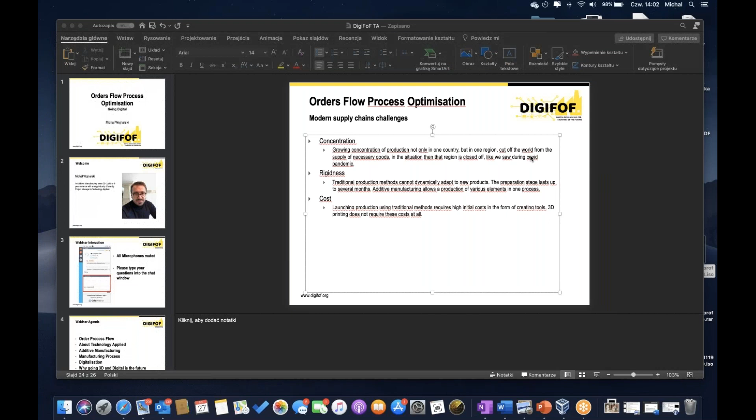Let me switch the presenter rights. Okay, I'll introduce myself again in a moment, just let me start sharing my screen. Is that all visible? Yes, that is visible. But first I need this to work, let me go back, I was doing some review.

Hello everyone, it's great to be here, it's an honor to present. A few words about me: I'm in additive manufacturing since 2012, with a small break for the energy industry, and right now I'm a project manager at Technology Applied.

I'm actually dealing with processes, so it's a great opportunity to present this issue to you. I'll try to condense a very broad topic, because we're dealing not only with the order flow process but also supply chains, and how these two things play together. That's the agenda, more or less.

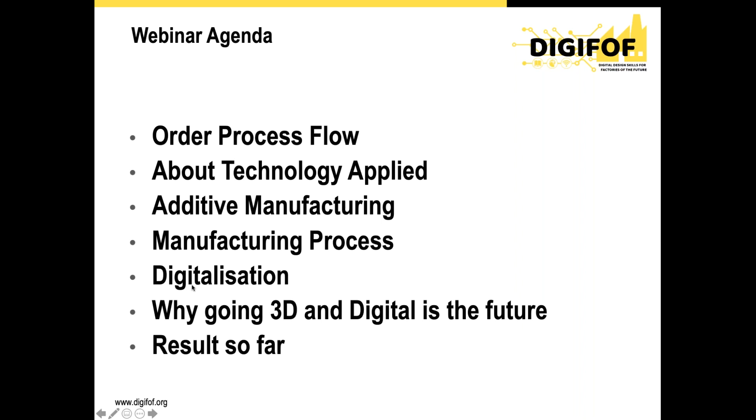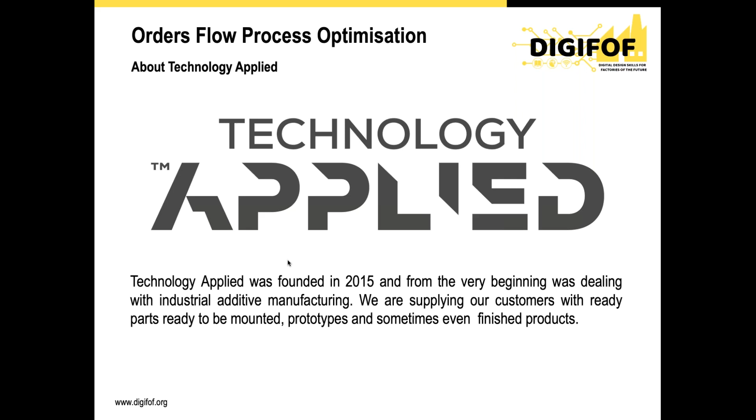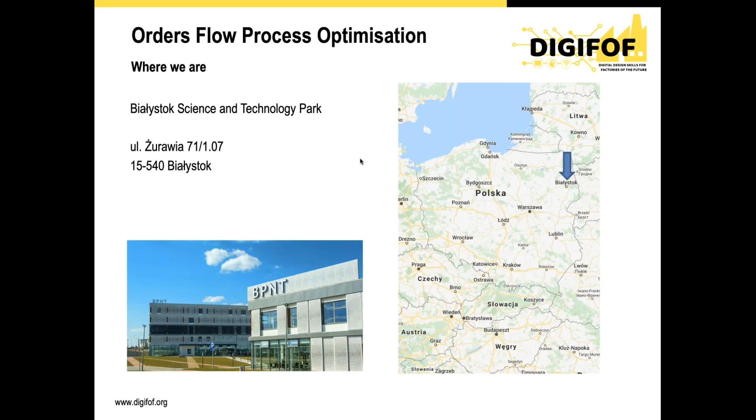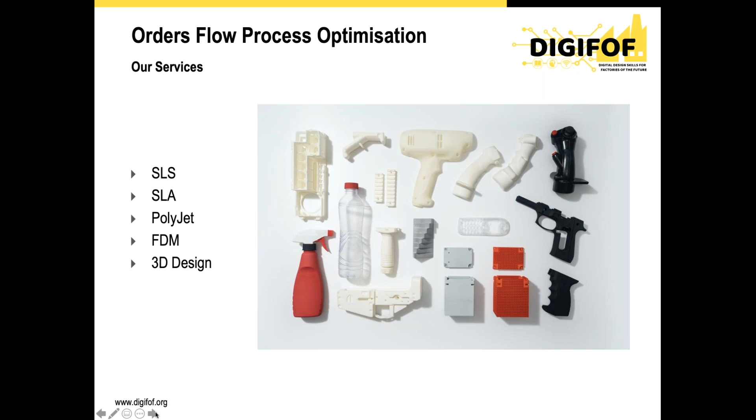A few words about Technology Applied: we were founded in 2015 with 3D printing in mind. We're one of the leading Polish service bureaus in this regard, specializing in SLS technology. We're based in Białystok, Poland, in the Białystok Science and Technology Park, so you're welcome to visit us anytime. We offer all major technologies apart from SLM yet.

That covers Technology Applied, so let's get to it. Let's talk about additive manufacturing. Probably most of you are familiar with it, but just for the sake of it, I'd like to give a brief introduction.

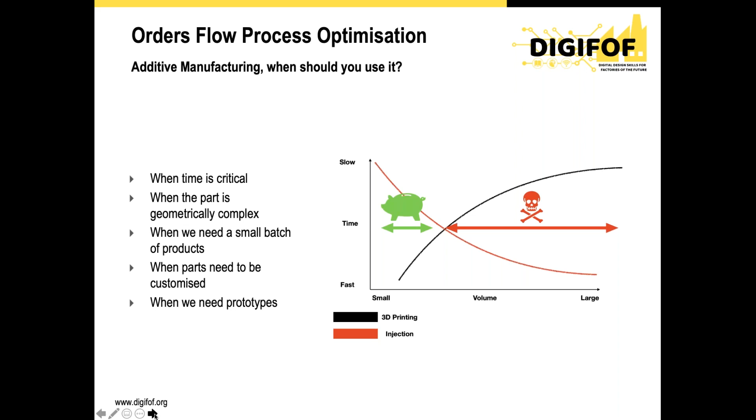Where additive manufacturing places itself in the supply chain: anytime time is critical, anytime parts are very geometrically complex, when we need a small batch very quickly—that's usually the case—and when parts need to be customized, or when we need prototypes. These are the instances where additive manufacturing is your best bet. We still believe there's much more area for additive manufacturing to expand.

But let's get to the process—this is probably the most annoying thing to companies that work in this industry. What's great about additive manufacturing is that it doesn't matter whether each part is different or they're all the same. But that's also the most challenging part.

If you can imagine, when you have a process—let's compare it to traditional methods like injection or CNC machining—you usually design the process for one part and then continue, so you can iterate and finally get the perfect process. In our case, the whole production line usually deals with different parts, so that brings many challenges to managing this whole process.

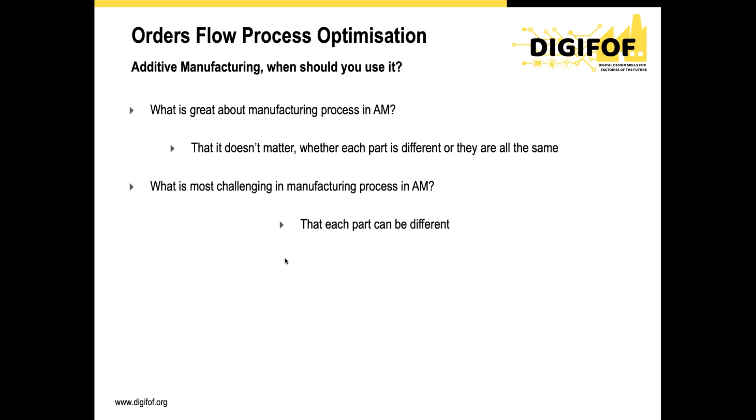We will discuss these problems on the digital side. The manufacturing process in our case—and probably it's the same in most companies—we get the file, or we don't, then there's the design part. It needs to be suitable for 3D printing, and of course suitable depends on what technology we're dealing with, so the file needs to be repaired or modified.

Over here we have many more options, but I would say the industry is not yet that open to these more advanced options, let's say.

So final quotation can only be provided using a pricing algorithm. If customer accepts the quote, the file is queued for production. Then the operator prepares the build platform considering all the requirements, puts together all the files and all the prints. Then we have the print process, and if post-processing is required, the print goes to post-processing, packaging, and delivery.

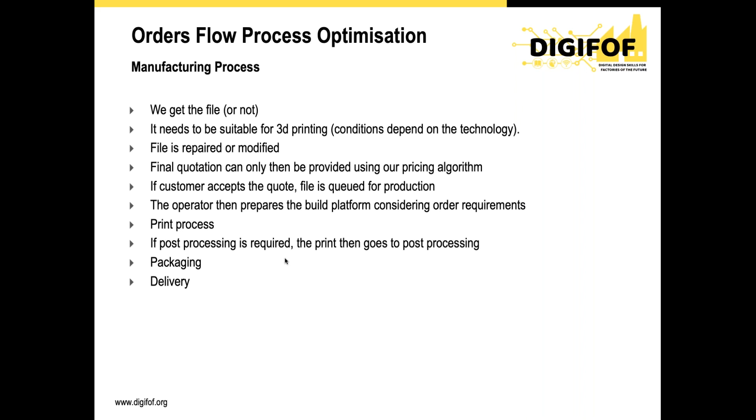So you see, we will be discussing mostly issues related to the first couple of points, where we're still dealing with the digital file.

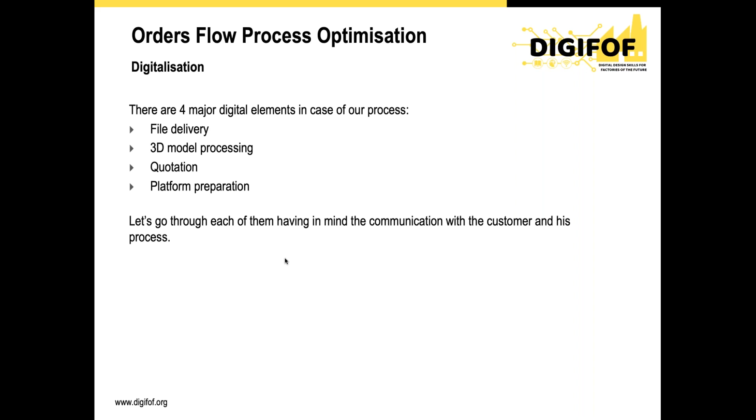So we have 4 major digital elements in this process. First of all, we have the file delivery, all of which will be discussed in next slides. Then we have 3D model processing, which is probably the most interesting and the most unused as of yet. Then we have the quotation and platform preparation.

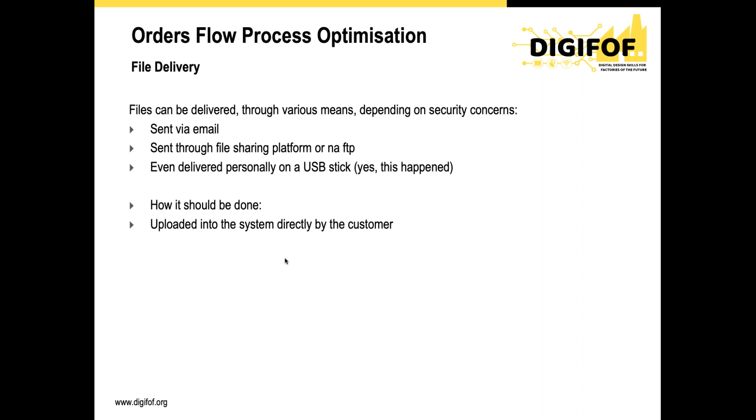So let's start with file delivery. Right now, in practice, it's either sent via email, through a file sharing platform or an FTP, or sometimes even delivered on a USB stick. And this really happened. In our vision, a system should work in a way that files are always uploaded directly into the system by the customer, so the file is not sent through other means.

Then we have 3D model processing. This stage includes file evaluation, file repair, or file modification. In evaluation, we need to see whether this is a suitable model to be 3D printed. So we're talking about wall thicknesses and some geometries, or perhaps simply there's an error in the model and it doesn't work. Sometimes it's an issue of units. But most of all, it needs to be watertight, so the machine can print all of its parts.

And when we have lots of modifications and suggestions, the file needs to be sent back and forth between us and the customer, which is really inefficient and takes time. So iterating that file poses some security risks, one might say, and it's basically inefficient. So in our vision, all modifications should be done within the system, so both client and service bureau can work on the same thing.

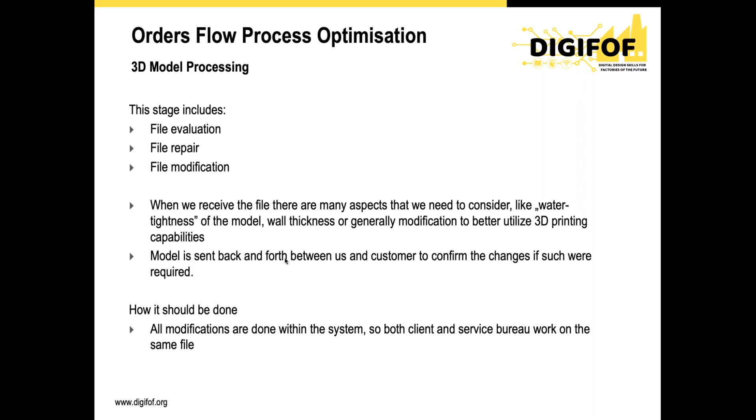So basically collaborative elements. Then quotation. So quotation can be done either manually, simply by calculating model volume by price of each volume unit. No one does that, but for the sake of it, I'll present it. Of course, that process is time-consuming and prone to error, and also for most technologies, basically powder technologies, the function of price and size is not linear. So it's each, let's say, cubic centimeter, it is not.

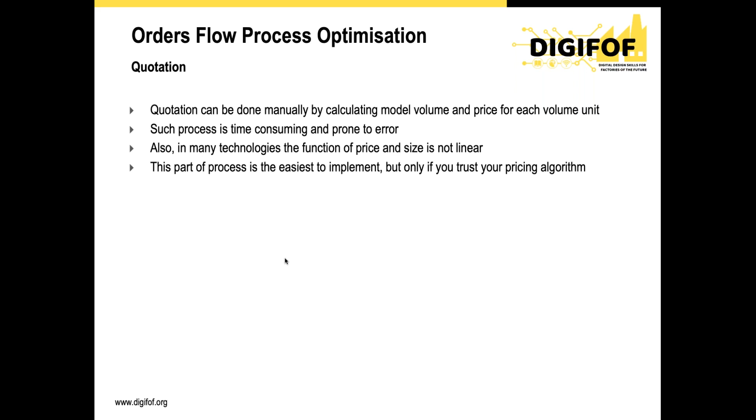So 1 or 2 cubic centimeters is not equal to 1 + 1 very often. This part is easiest to implement, but of course you need to trust your pricing algorithm. That's the most important thing, because if there are some errors, then there's no other way to check it further on.

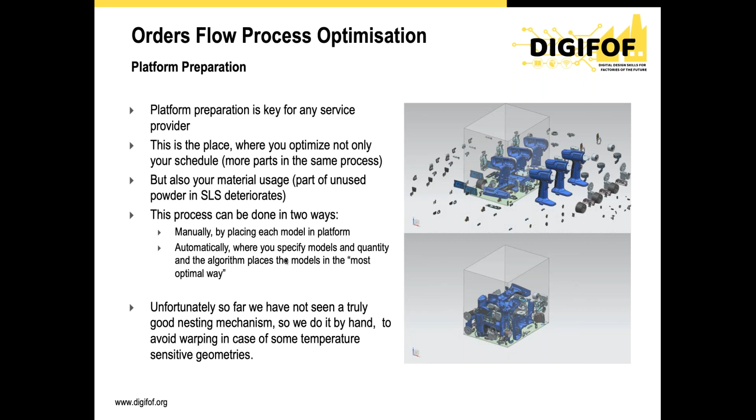But at the same time, you need to consider thermal aspects. Certain shapes need to be positioned in different areas of the platform. So you can do it either manually or automatically, using an algorithm that does it in the most optimal way. But so far, we really have not seen an algorithm that does it as efficiently as a human being can. So there's still a lot of work to do in this regard.

And this now leads to our digital warehouse idea, which we started conceptualizing by introducing certain elements of what I have presented so far. Like we have of course the quotation, and upload capability, but in order to really materialize this idea, the customer needs to hold his parts on a platform that we can also work within, so he can work within.

When he orders a certain part regularly, he doesn't have to go through the whole process every time, because right now, even if he does, we still need to validate, we need to check with him. So it's still going back and forth because he doesn't see our parts in our folder. But in this case, when he sees all the parts he needs, his order goes straight to our production queue.

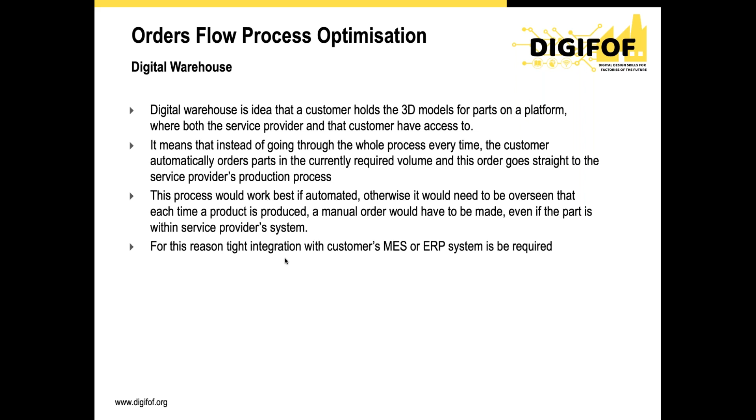Of course, it would work best if it was automated, meaning our system would be somehow integrated with his MES or ERP system, and this is something that is really lacking. We have various systems that offer this kind of functionality, but it still means a company that needs a part needs an employee who oversees all these parts and makes these orders. He cannot do it from within his system. Let's say they produce a machine, and it's not that they see within that system whether they have this part available or already ordered. Someone has to manually check our software, our website where he can log in, to see that this part is ordered.

So that's the whole idea of greater integration, and this is lacking currently. So we cannot realize this greater additive manufacturing integration into modern supply chains.

Such a digital warehouse would provide better communication between the client and the contractor. It would definitely simplify the ordering process, therefore reduce the cost, and eliminate human errors. Some parts were simply confused — it happened with us, it happened with the customer, especially when there were various iterations of the file. When the customer sent us another one, then we suggested changes, and in the end people got confused, and you had, like in all digital work, a final version, final, and final version 3. So this collaborative aspect is very important.

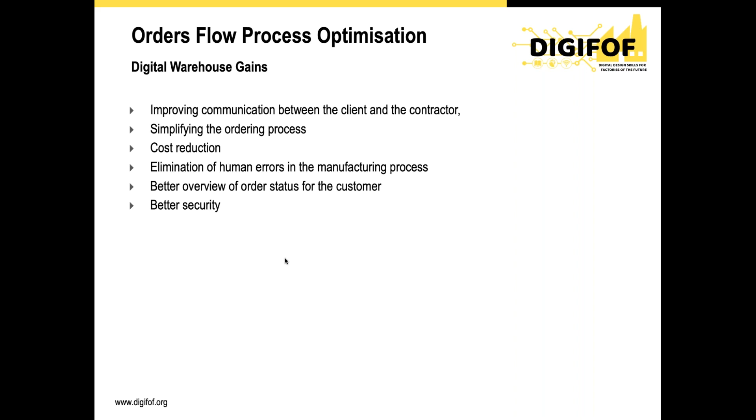And then again, better security. As I mentioned before, the more a file travels, the more insecure the process becomes. So the system should be tight, and by keeping the file within the system all the time, it's definitely much more secure.

When we started implementing parts of the system, we were actually thinking about setting it up on our own server within the company. But the problem with that is it then takes time for any updates to be implemented. In order for this process to be very secure, you can do it either on a local server, putting aside all the problems that can happen, or you put it on top of a cloud provider, which is the solution we're using currently.

And then again, when everything is within one system, it allows for traceability of the file. But if the file is taken from the system and sent via email or through any other means, that means it's already somewhere out there. In a system where it cannot leave that system, it's much more secure.

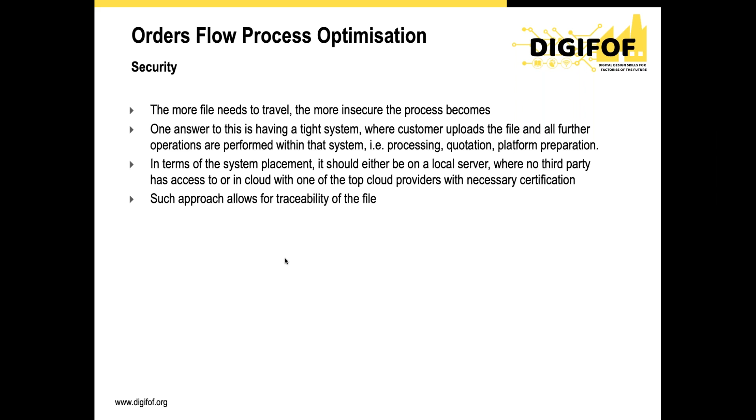So in our opinion, traits of a good order flow process are as follows. It should be tight, meaning there should be no information leakage — either intentional, by sharing during collaboration, or unintentional, that is a security breach. It should be complete, comprising all the elements like file delivery, so the customer simply uploads the file.

All the file processing can be done there, because right now we need to take that file, edit it in whichever application suite does it best, and then put it back in the folder. There's also build platform preparation — again, every machine is different, and not all software can do it properly, so we need to take it and prepare it outside. Once the file is complete, we take it and put it in a different software best suited for nesting, which is putting the whole build platform together.

And enabling collaboration — our customer and us can both work on the file, present suggestions, iterate, and all the versions are easily identifiable.

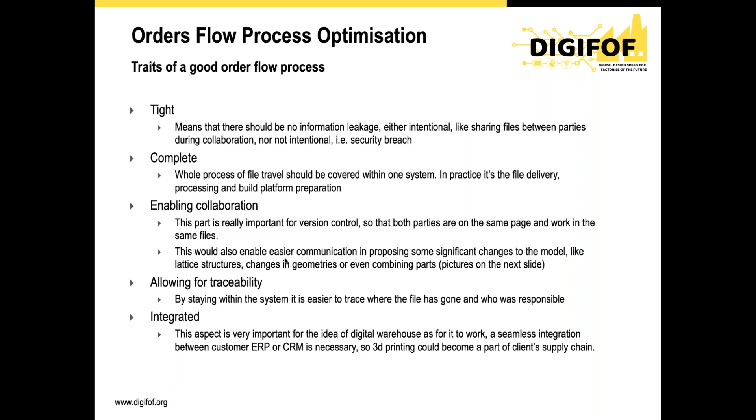In any case, coming back to the point of collaboration, to do a little bit better communication, proposing some significant changes to the model. Here we have the idea. You have the original design, and then you can optimize the topology, and you have a redesigned antenna bracket. As written below, the part is now as strong as it was before, but it's lighter by 40%. Being able to collaborate with the customer readily would allow us to propose such solutions, and it would be probably easier to present it to them.

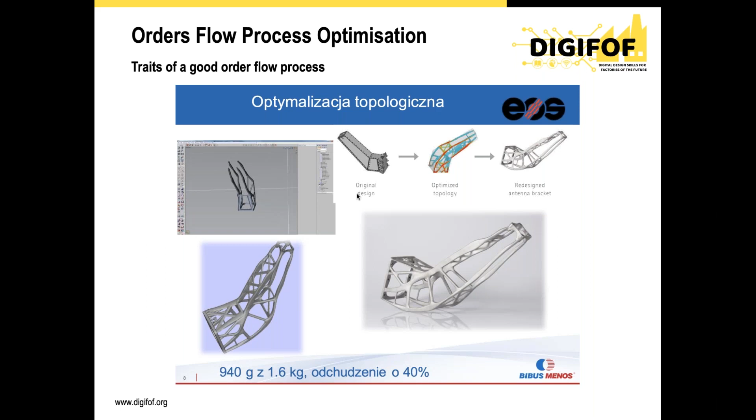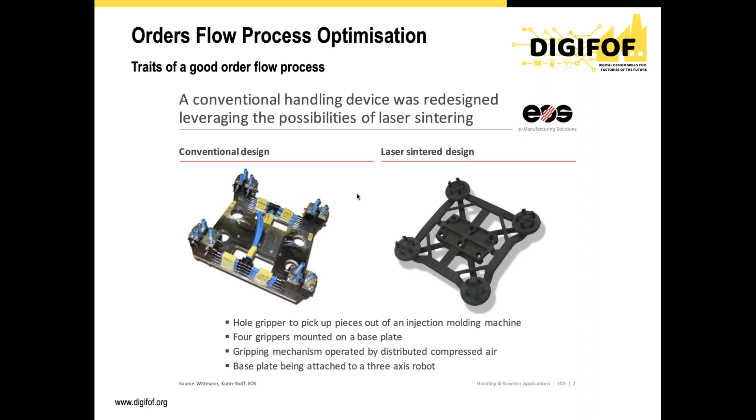Again, you have various parts in conventional design, and then you have laser sintered design. This is another great advantage of additive manufacturing, that if you change the philosophy of thinking about production, you can actually combine many parts into one part and then have it 3D printed.

So why 3D? Because of speed. There's no need to prepare tools for a specific detail, which means production can be started immediately. And of course, flexibility, so no upfront costs associated with the necessary tooling to manufacture the product, and freedom in modifying parts geometry.

And why digital? Digital is a bit misleading because we're dealing with files, so of course these are digital objects. But in terms of digital, we mean greater integration between additive manufacturing providers and, let's say, traditional users of other manufacturing solutions. So digital would mean increasing the speed of order fulfillment, ongoing monitoring of orders and stage of implementation, minimizing possible human errors, and reduction of cost of preparing documentation.

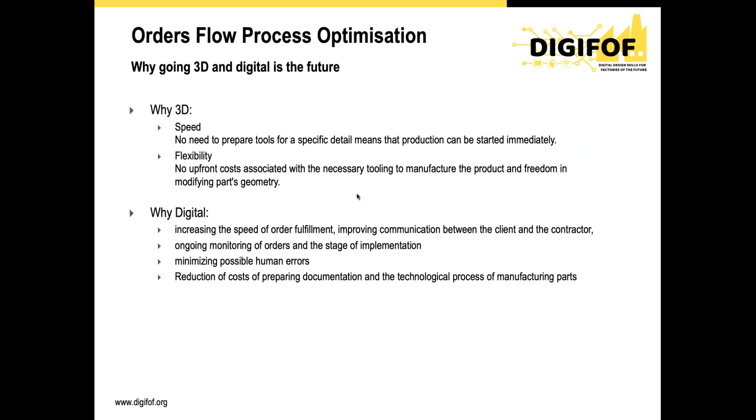So let's say our idea really is to have some sort of window into all the SAPs and all these kinds of systems within large contractors. From there, they could simply treat us as another subcontractor, and then we could also work within our system, but still on the same file, and simply send the file back to them. Not the file, but the ready final print.

And why we believe we should increase the involvement of additive manufacturing within industries is because of the growing concentration. The best example, we even made a report on that some time ago, was the COVID pandemic, when all the world was cut off. When they closed down Wuhan, suddenly one of the major manufacturing centers of the world was closed down, and many manufacturing companies ceased to have access to essential parts for their production. So what we are trying to propose, what we're promoting, is to more decentralize production. But of course, in order to do it, it needs to be very efficient and optimal.

Then also, traditional production methods are not as flexible as additive manufacturing. And then the cost, but of course the cost plays a role only when you need to have it in a smaller batch.

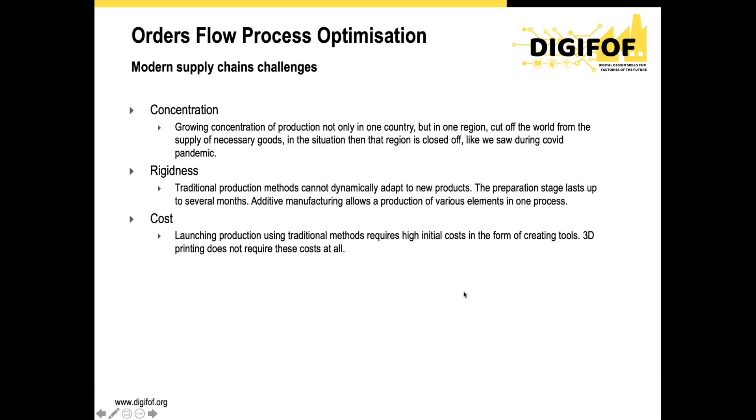So our conclusions and recommendations are to have initiatives like this one for all the stakeholders and industries to have discussions, to share these sorts of challenges, for the knowledge to diffuse, and perhaps someone can come up with something, given what sort of challenges we're facing.

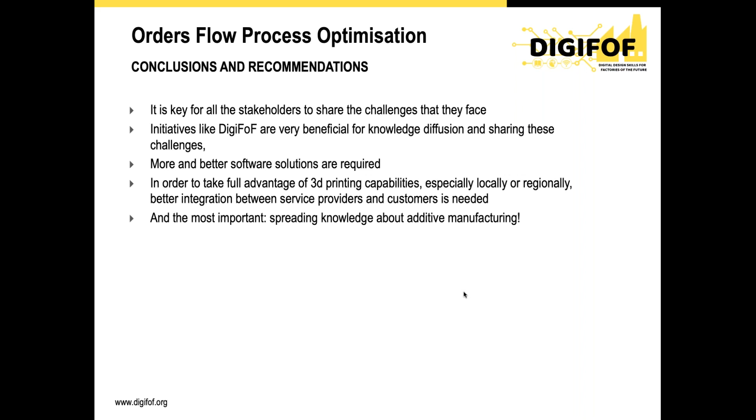Definitely more and better software solutions are required, and we need, as an extension of what I just said, definitely more cooperation, more integration between service providers and customers. And for that reason, we need to spread knowledge about additive manufacturing. The more people understand it, the more they know it, the more advantages of 3D printing they see, the better for everyone.

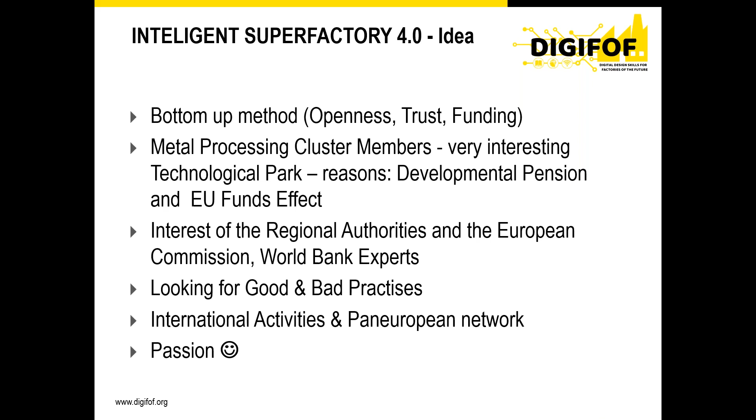And last but not least, the passion of the people engaged in our projects. So in the first stage of our project or idea realization, we started with an endogenous model with a preparation and pilotage stage. We finished this stage at the first Warsaw Industry Week, and before that we found three main challenges in a few aspects: business, conceptual, and technical transformation.

We realized this process in one of our bodies, the Enhanced Cooperation Group - we have 7 of these groups. The dedicated group for these challenges was technology. So we have the ability to offer more complex products and services not possible to be delivered by a single partner. That was the experience of our first activities - that our common proposition is more attractive than what just a single company can do.

Also a really interesting piece was better utilization of available resources, mainly machines. Why? Because after EU funds, our companies have a quite interesting technological park, like I said before. But when we think about using these machines, using this technology, we found that only 30% were utilized when looking at activities across 24 hours per day, 7 days a week.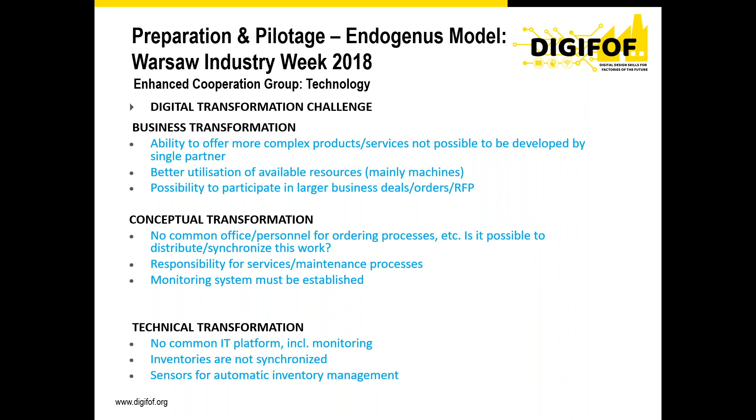So without passion, it would not have been possible to create our first pilot model, and we were in fact acting on our endogenous potential in the cluster.

And what was the reaction of our external partners when we were at this fair in Warsaw? That was really interesting, because they said, you showed us a concept on paper just a few days ago, and if I'm thinking correctly, I can see that proposal in reality - and that was true.

When we started to make an inventory of our possibilities, we saw that we've got most of the technology in our case, in our hands: automation and robotization, mechanical engineering, system integration, Internet of Things, cybersecurity, cloud computing, additive manufacturing, AR and VR technology, also big data.

So we, as coordinator of the metal processing cluster, can do most of the technology, and that was the reason we first started to move toward the exogenous model. We began to discuss with our Ministry of Entrepreneurship and Technology to try to propose preparation of a competence center model, a model of collaboration of different partners in an integrated system.

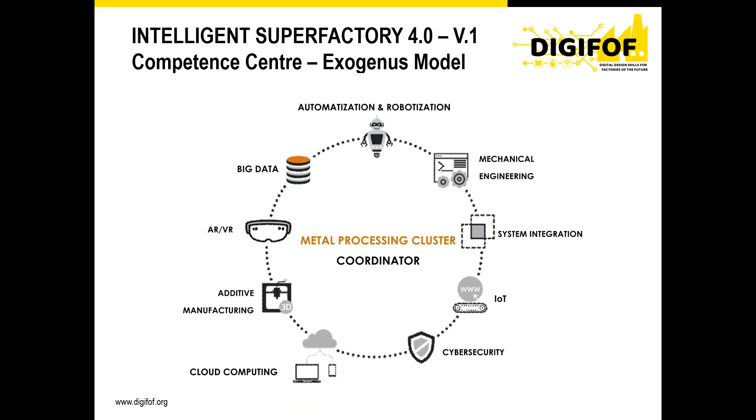And also, after finding or building new good practice, we saw that not everything was so easy, and passion is not the only important thing in our process - self-discipline is too. That was one of the biggest problems in corporations, in such a huge company.

So a few months later, we tried to prepare, in a new stage, the Intelligent Superfactory 4.0 - a second version of our project, also based on the exogenous model, because our ministry started to fund digital innovation hub models.

What was really interesting in our case is that the consortium for this project was bigger than the first time. We knew we needed more competences, not only one player in the area, but backups for different areas like cybersecurity or mechanical engineering.